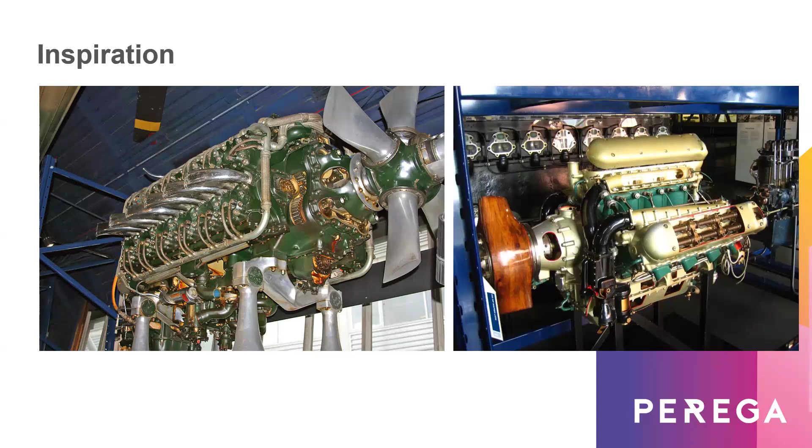So I started at school. I realised I needed A-levels, and then I realised I needed to go to university. Most of my school life was centred around sport. But before then, this is a picture of the front of one of the aircraft engines.

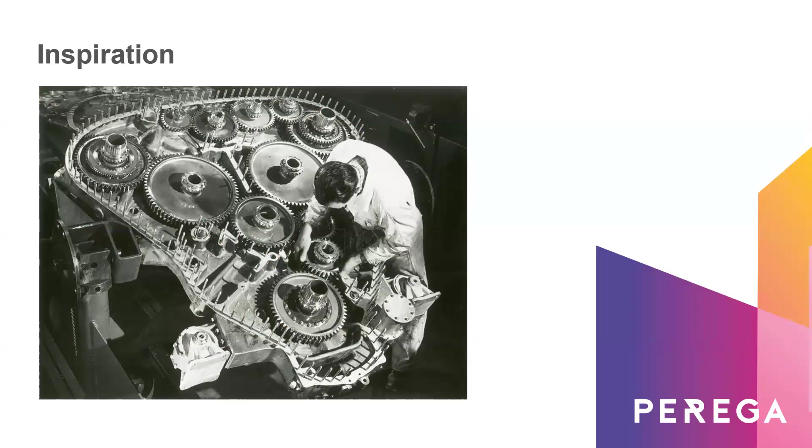1940, no notion of a digital age, no computers. Everything was done by hand and feeler gauges. And when you look at that and think about the engineering, this is mechanical or aeronautical engineering, we would find it quite hard to do that even now, so let alone then.

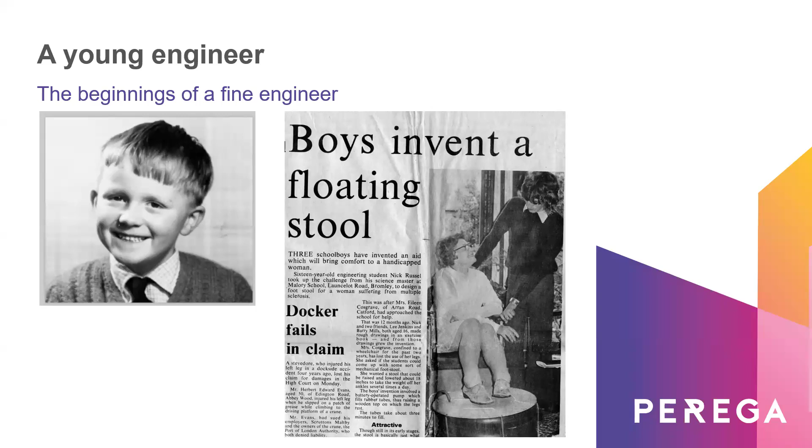The press came along, took the photographs, off they went, and she said, right, how do I deflate this thing? Press the button, and it didn't work. We did eventually get the stool to work, but one of the things about what civil and structural engineers do is that it really has to be right first time. There isn't any real room for failure.

And my parents were very supportive. They said, look, we'll support you through university, but you've got to stop doing all that sport. You need to knuckle down and learn. So day one of university, I joined the sailing club, which has been my passion ever since.

So very, very quickly about Perega. We were formed in 1947. 6 offices in the UK, 85 staff. The pandemic saw us dip a little bit, and in this financial year we've taken on 15 really good engineers. We're active in various sectors: health, education, retail, but the only thing we really don't do is heavy civil engineering work.

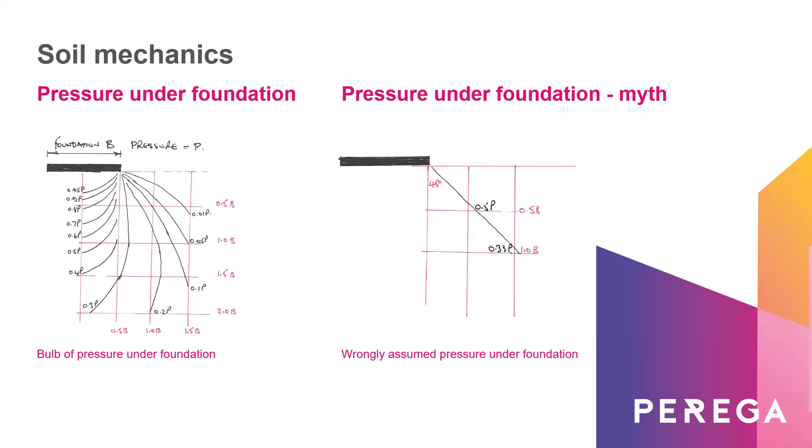And pressures on the foundations - one of my first cases is all about this, where a pressure bulb is very much like what you see on the left-hand side. The 45-degree slope where pressure is supposed to dissipate is really a bit of a myth. And this whole question of the bulb of foundation pressure has caught a lot of people out.

So, on to the first one. This is a basement in London, in Mayfair. Mayfair is one of the sort of posher parts of London, if I can put it like this. This building, about 200 years old, and the client wanted a basement constructed under the whole of the footprint. The building itself is a collection of load-bearing masonry and brickwork construction, pieced together over the years, but in relatively good condition.

Underneath the building is one of the old rivers of the River Thames. A lot of the rivers have been culverted, covered in. Some run in tunnels, some just run through gravel, some just run through the ground. One ran right underneath this building, called the River Tyburn.

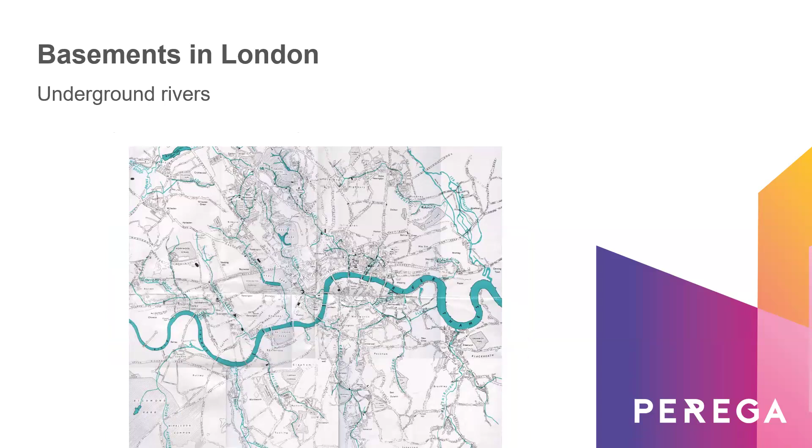And then the plan was to construct a piled raft underneath the building, between all of the steel columns, and construct a reinforced concrete wall incorporating the steel posts.

Now, unfortunately, very little site investigation was done. The client decided that would all be done once the contractor was appointed, because when contractors do site investigations, of course, they do them for free - but we all know that it's included in the cost.

So what happened was that the load of this building was transmitted down into some of the soft alluvial materials that were formed by the old River Tyburn. Not immediately, but gradually the building started to settle under its own weight.

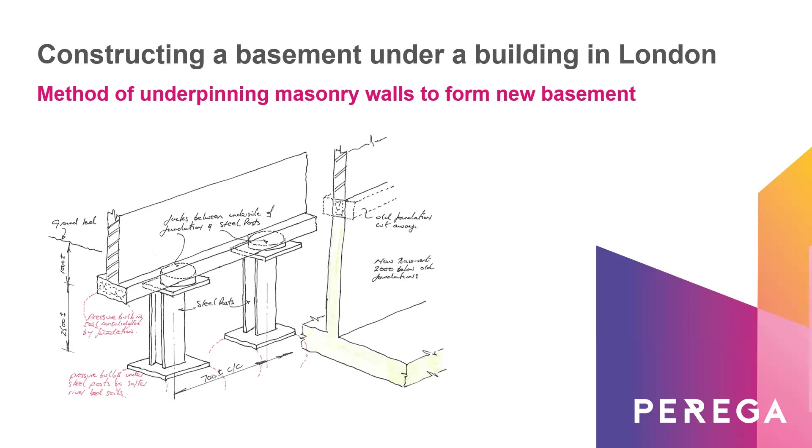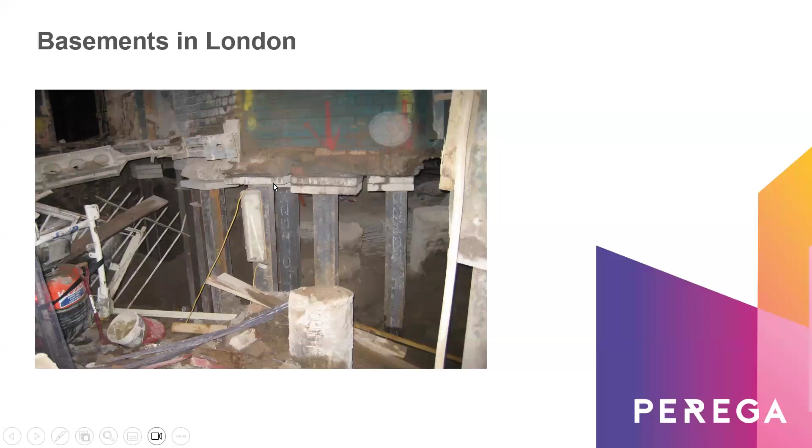Here you can see some of the very congested area where the construction took place. These are the steel columns that were being put in. Some were simply bricked up underneath the foundations, whereas others under the main wall were jacked into place. There again, we can see some of the work that took place.

One morning, at the start of the day, the contractor noticed cracks forming in the superstructure. They started to monitor it. By about 10, 11 o'clock, the cracks had got even bigger. They called out the engineer. They then had to evacuate the whole of the building because the cracks were getting wider.

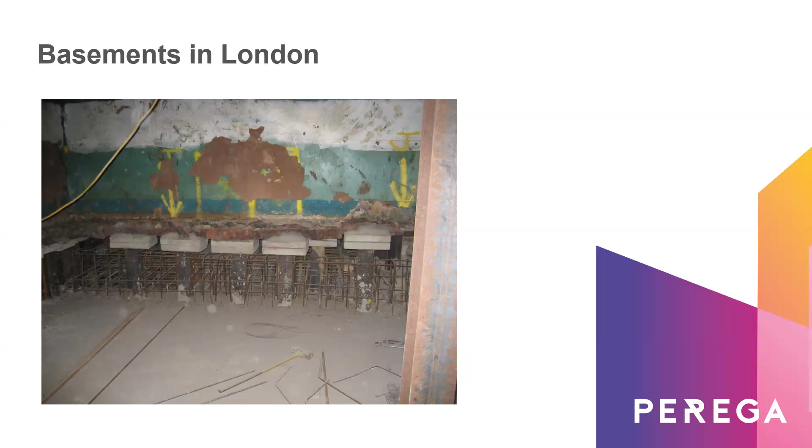Various types of profession in the building. And then by about 7 o'clock in the evening, part of the building had collapsed. You can see it's very, very dramatic. Fortunately, all the people occupying the building had managed to get out.

There again, you can see the nature of the construction of the building - a lot of it was timber, load-bearing construction. So an example of how not to do underpinning, a lack of appreciation of how you transmit loadings from the underside of a foundation down to a lower level.

The foundations, over 200 years, had compacted the soil beneath them, and the soil had become in equilibrium with the weight of the building. By transferring that load further down into much softer material, this caused the gradual settlement and the collapse of this part of the building.

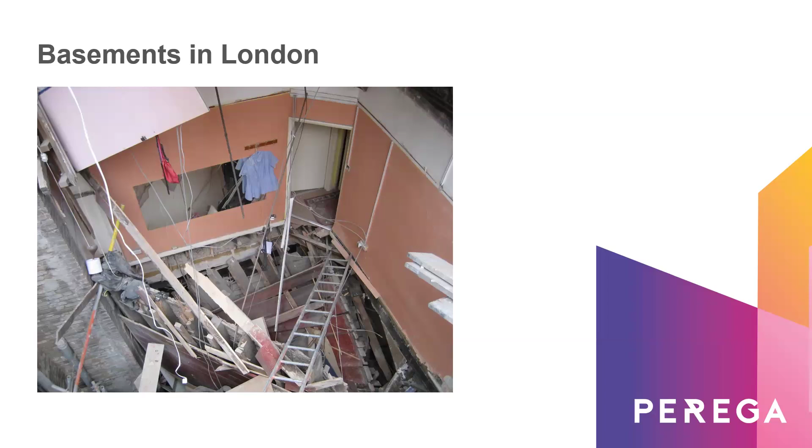So, the sort of things we take away from this: really do think about site investigations, and make sure your client understands the need for them at the beginning, not when the building's starting to be constructed. Think about investigating the building. Again, the client wouldn't pay for investigation until the contractor was on build.

One of the two partners of the consultant working on the project was the director of the piling company that was employed to construct the foundations, and that person checked the piling calculations, which were later found to be in error. So there was a clear conflict of interest there. The engineer did accept, in hindsight, that they should have been more thorough, and should have been far firmer with their client about investigating the building rather than letting matters progress as they did.

This one is a building in England, and I'll just mention that all of these cases have been settled. They are of some age, so there are no commercial issues in me telling you about these things. Naturally, I've left out some of the things which are confidential.

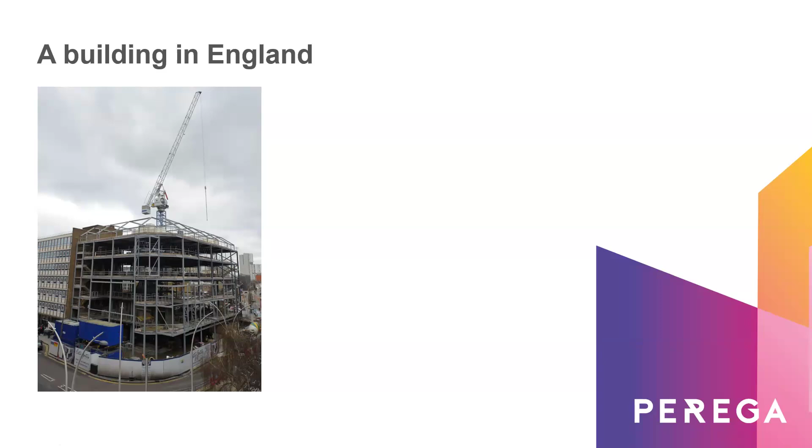So, steel frame building in England. The idea was that from first floor level to the underside of third floor level was going to be a clear opening with seating around the outside. Part of the building was a library, part was an exhibition centre. So you can see the cross-section this way.

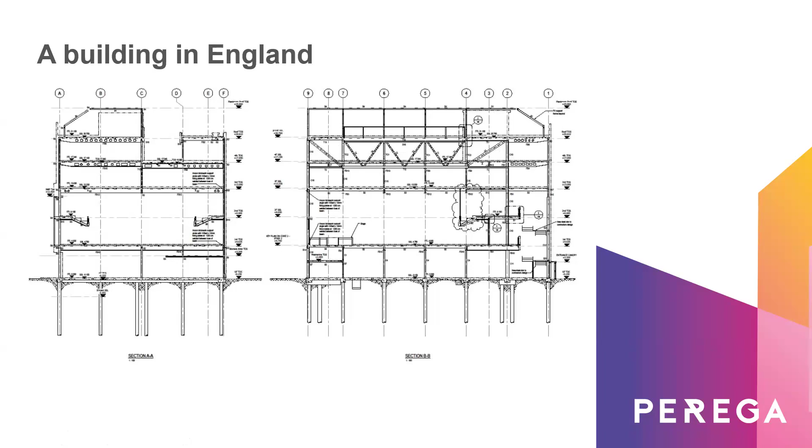The important thing to note is that at this level, fourth floor level, between fourth floor level and fifth floor level, is a truss. The truss is suspending with three hangers here, four hangers here, suspending this floor. This section applied as you go through the building, so a very large atrium area through the building. You can see that there.

So, as we would all analyse, you've got your truss, you've got the loadings from the hangers, and you can sketch fairly easily the direction of the forces. All fairly straightforward stuff.

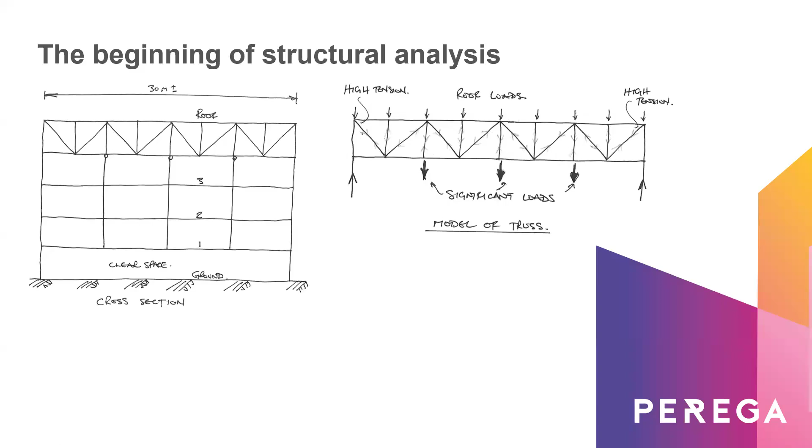This one was put into a computer model a few years back, an early version of a computer model, and it was modelled like this: all of the loads were applied to the top of the truss, no loadings on the bottom. So, as we all know how to design trusses, these loadings, according to the computer output, were zero.

The connections, as we'll see in a minute, the connections at the end of the truss here were not very well made. Fortunately, the fabricator put minimum connections into each of these hangers, something like four M20 bolts as a minimum. So although the force in theory was zero, there was a certain amount of capacity in the truss.

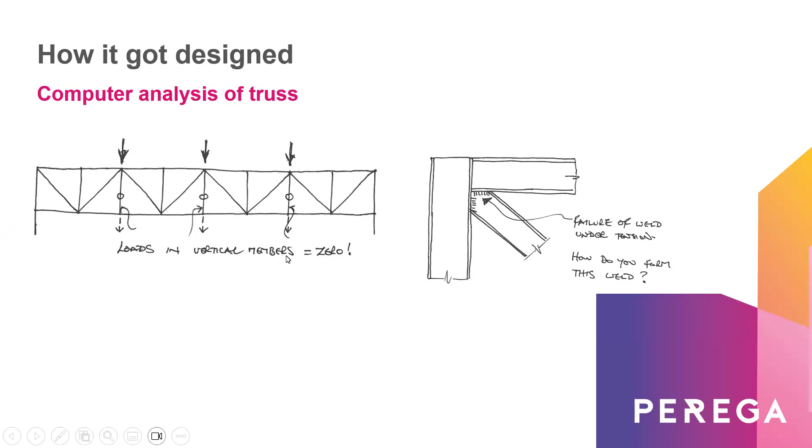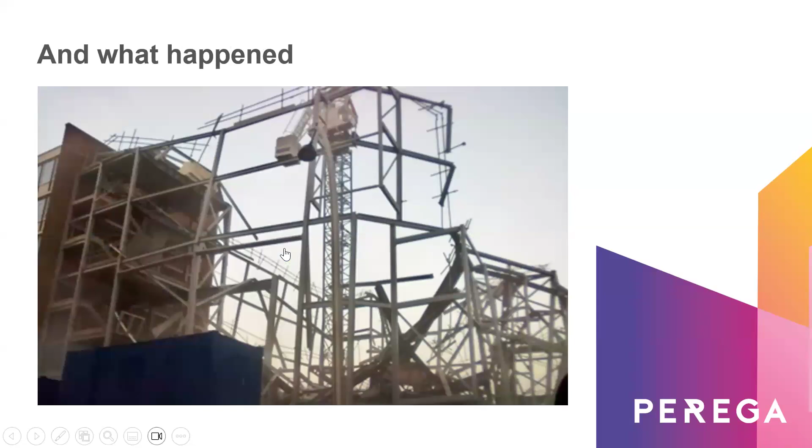Twenty minutes later, just after the building had been vacated, that's what happened. So one of the things you see from this is that it's not a particularly robust building. There's not many load paths, and here we can see one of the trusses lying across all the other stuff. You can just about see the connection there.

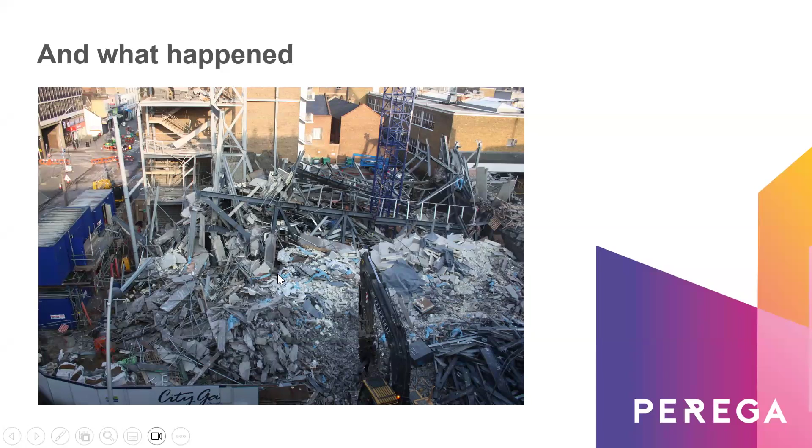The failure was partly the hangers, partly the building, the floors beneath failing, pulling the truss in, and some of the connections just failing. We can see it there, we can see it there. This was a sketch done at the time, showing broadly what the connection looked like and where the inception of the failure took place.

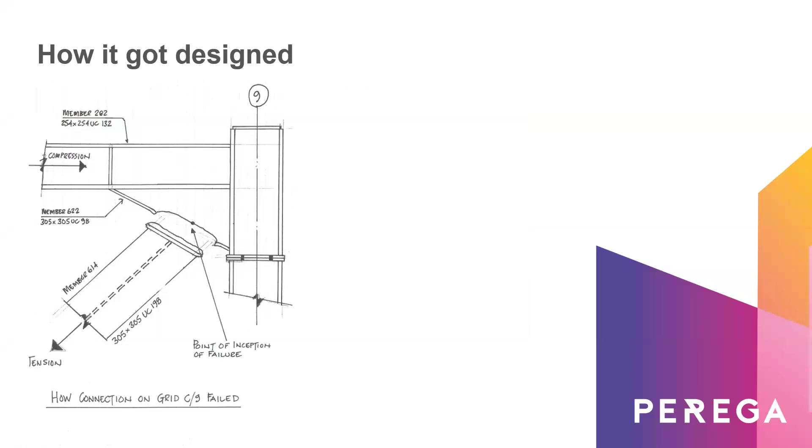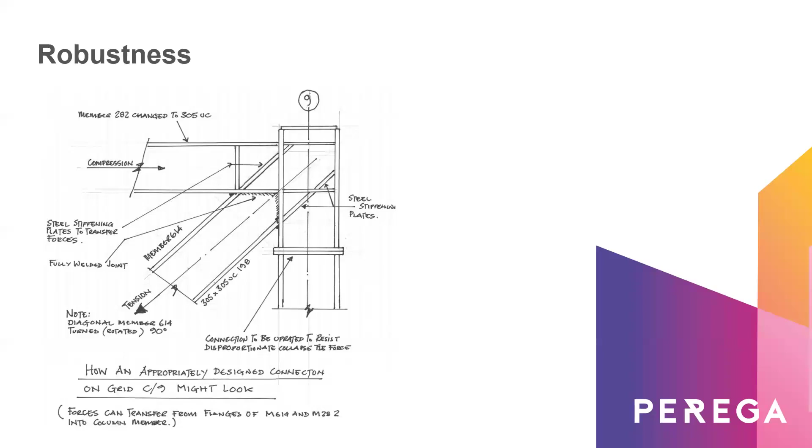That was a sketch we produced simply to show the difference between a robust connection and one that isn't robust, so that all the forces are going back into the body of the truss rather than relying on very, very simple web plates to transmit that force.

I suppose the thing you really learn from this one is that anybody can work out loadings. We can all do load takedowns, but you need a certain amount of experience, and I think, you know, an experienced engineer to know what to do with those loads. Had somebody really just taken a step back, not got carried away with the model, not simply tried to do all of the design within the model, I'm sure that would have been spotted and this wouldn't have happened.

So this one here is a gas pipeline.

Like South Africa, I think I showed this one to people when I came in 2014. But like South Africa, we used to manufacture a lot of our gas by burning coal and forming coal gas.

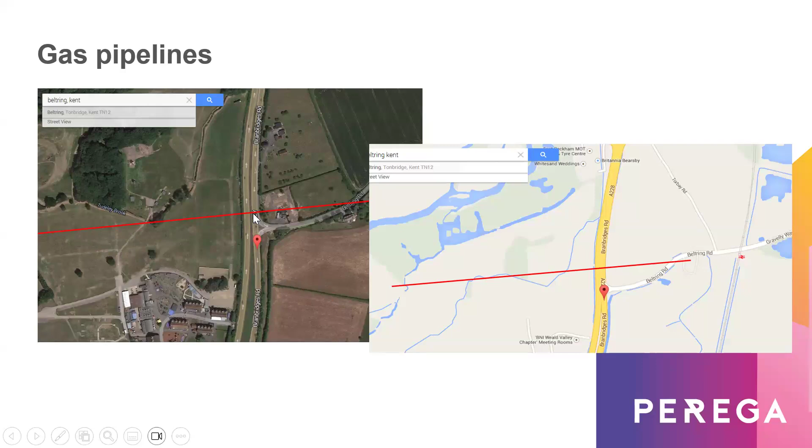As time went on, the roads developed. This is the line of the gas pipe, which goes underneath this busy dual carriageway. This is a map taken from some of the old Ordnance Survey maps. This is the old country lane that went through here, and this is the A road, which we'll talk about a little bit more in a minute. This is where the gas pipe went under, and then this road later became a dual carriageway - a very busy, very important road running north to south in Kent.

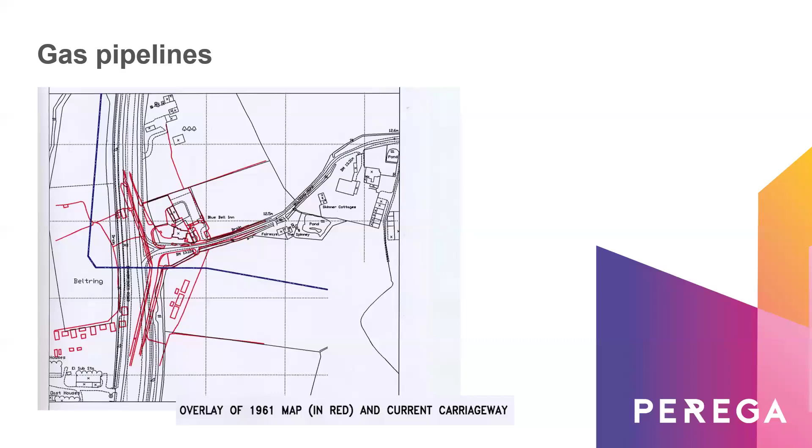This is a picture of the way the gas pipes are put together. A number of gas pipes are all welded together, ultrasonically tested, and then lowered into the ground. As you'd imagine, relatively little site investigation needs to be done - we're simply digging the trench, putting the pipes in, and covering them up.

Just another picture here - this is what happens at changes in level, and this is an enclosure here where they're doing some welding.

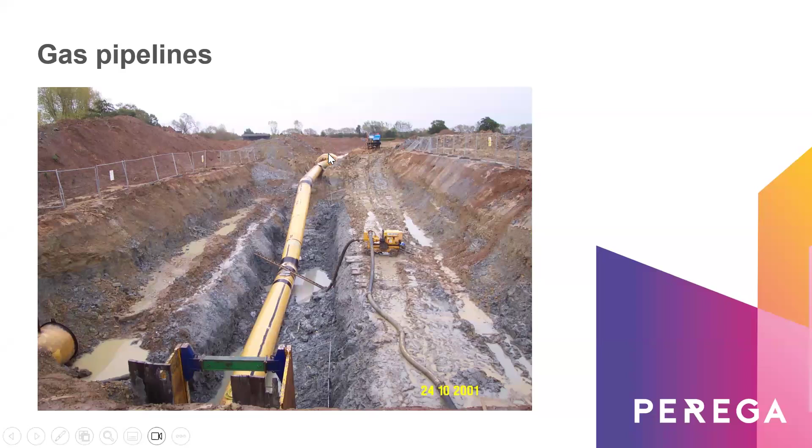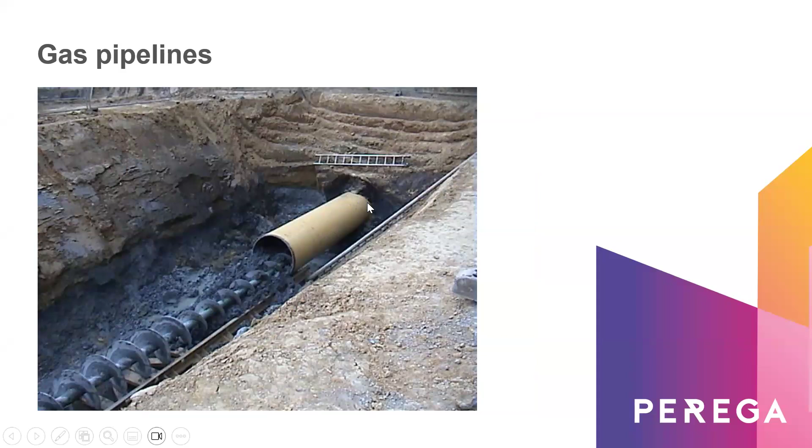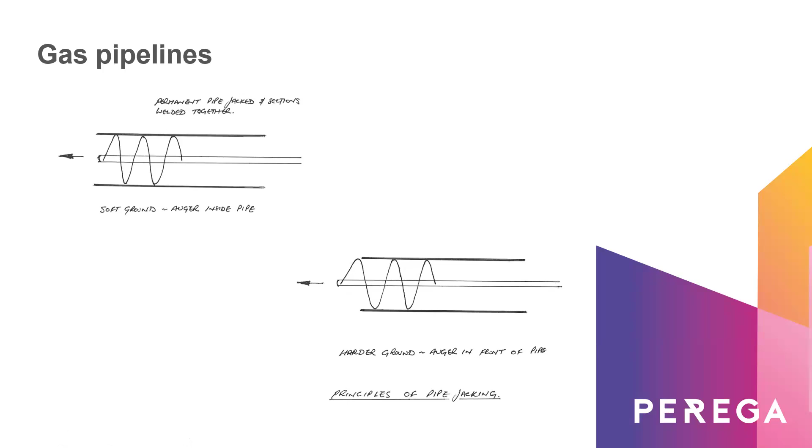When we get to a road or a canal - because this pipe's gone under a couple of canals already - you have an auger, and the auger takes the material out of the front of the pipe that's being put into the ground. In soft ground, the pipe is jacked in, and the auger, which is inside the pipe, augers away the material. In harder ground, the auger is advanced slightly in front of the pipe and augers away the material, and then the pipe is jacked along its route.

And you can just see it here - this is a pipe being jacked in underneath the road, and this is the motor and the jacking point.

Now just look at this. This here is a previous attempt to go underneath the busy road at a higher level, and you can also see it here - it's been blanked off.

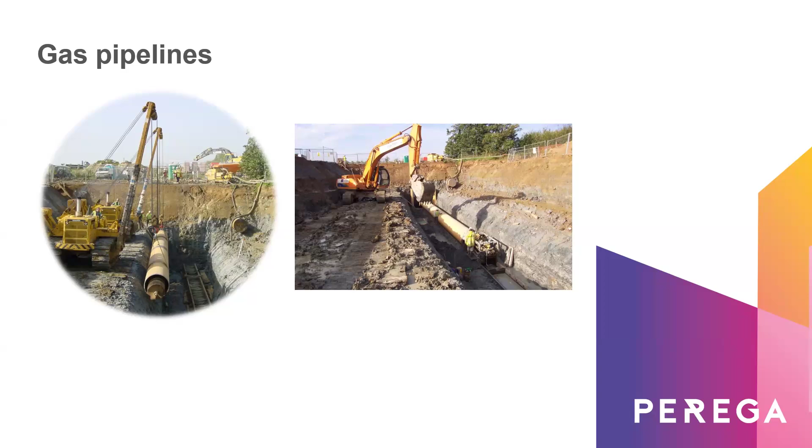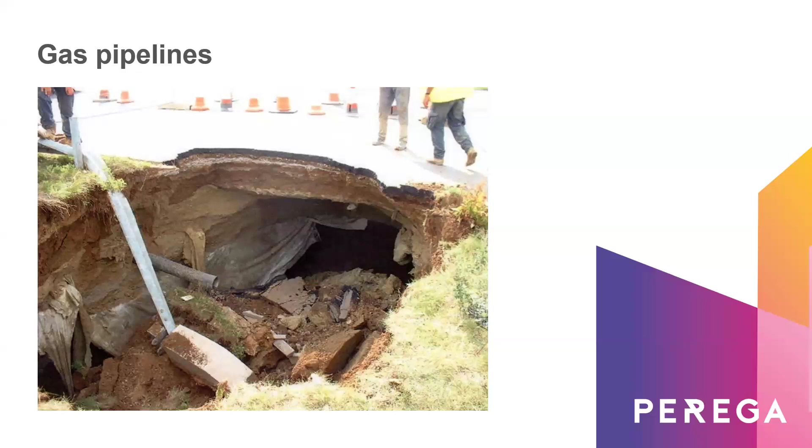And there again, we can see another picture of the damage - this is what happened. The county council became very concerned about the stability of the road. I think unnecessarily, in my view, but we ended up having to dig an extremely large hole to take out the remains of the bridge and the remains of the old river. It wasn't really the fault of the client that was there.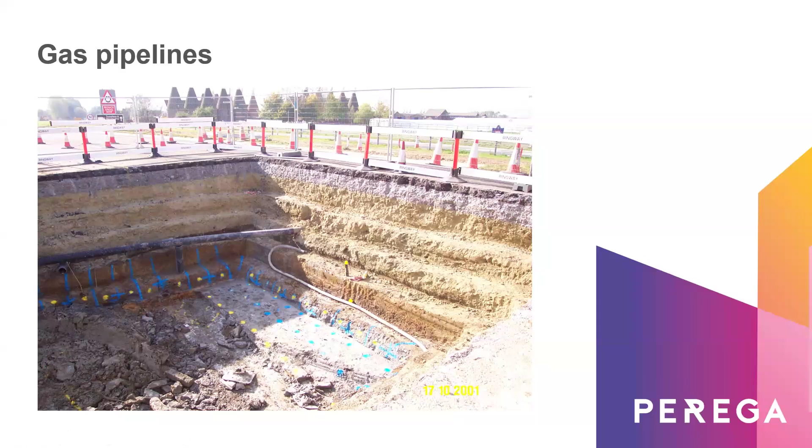Here you can see positions of pressure grouting going into the ground, and all of this took about 6 months. This building you can see in the back here - its trade relied on this road being open all the time, and over a period of 6 months, this business was nearly put into receivership.

So, the lessons from this one: there were no site investigations at critical points. You would think that each side of a crossing - a road crossing, a canal crossing - there would be some site investigation. There was no site research either; nobody looked at the historical maps, nobody looked at the types of things that might cause problems along the route of this pipe - a mistake that could quite easily have been avoided. The issue seemed to be that the pipeline was so long, and the budget was the budget, so they just carried on and didn't investigate too much.

So, sources of information: local records, place names - sites will often reveal their past. Things like Foundry Road, Marsh Road, Cemetery Lane, and even asking the lady at the bus stop, which I've done on more than one occasion. If you're investigating a site, you can strike up a conversation with somebody, and it's surprising what they might tell you about the history of the site.

This one is in eastern England, and this is another old gasworks. All of the coal being burnt here, and the coal gas being put into these gas containers here.

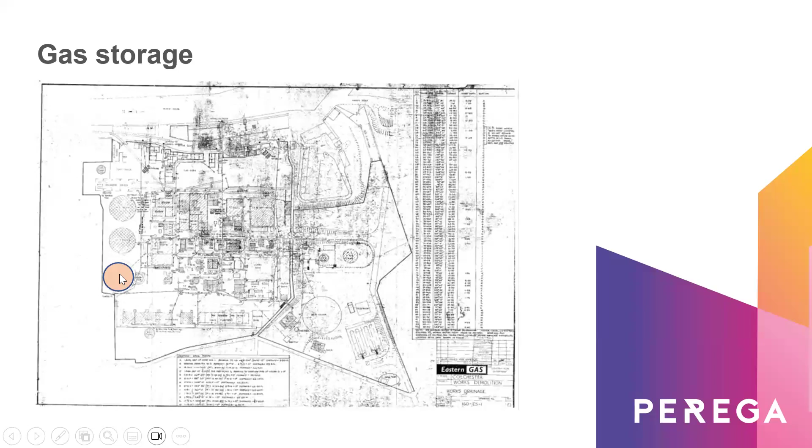As time went on, the gasworks became redundant. These are the 3 gas holders again. By this time, there's a spoil heap that's been constructed here by some works that are being carried out here. This is completely separate from the gasworks site.

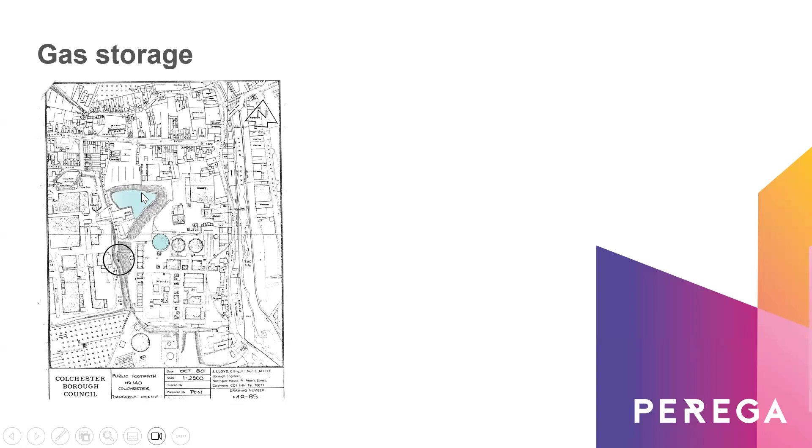It's not water; it's just coloured blue for recognition. So this is an embankment, and this is a sort of plateau level. There it is in a bit more detail, so there's the circular gas holder. This is the plateau here, which has been built up over time.

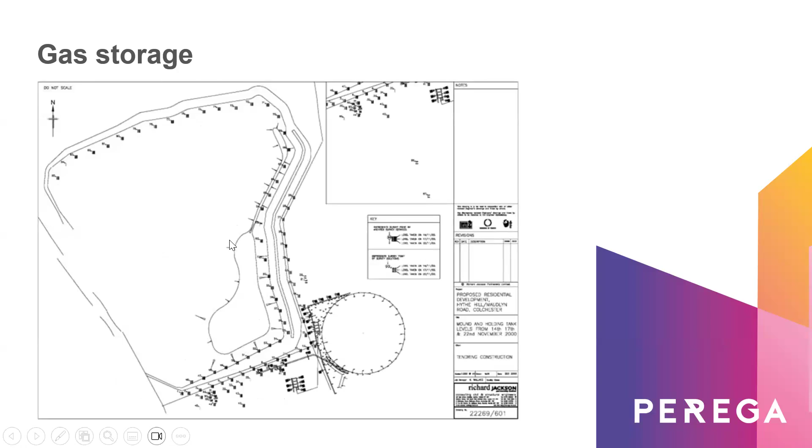Don't ask me why, but the local housing developer got permission to build a housing estate on top of it. Perhaps they thought the views might be quite nice from the top of this mound.

And there we can see it there. So this is the gas holder, and this is the mound here. This is about 80 degrees. I'll show you some plans in a minute. They're not very good quality, unfortunately, but this mound was increased in height.

The face of the mound was stabilised using tensile reinforcement, so geotextile material. Before that was done, the ground beneath this mound was improved by vibro stone columns. Again, not the best of site investigations, but the vibro stone columns were augured down, filled up with stone, and that was intended to support the additional weight of this embankment.

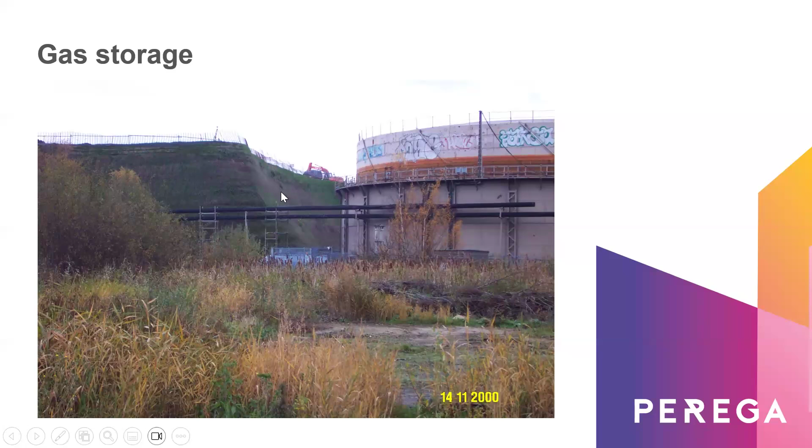So there again, we can see another picture of it, so you can appreciate the steepness of the embankment that's been formed here. Again, building works in progress.

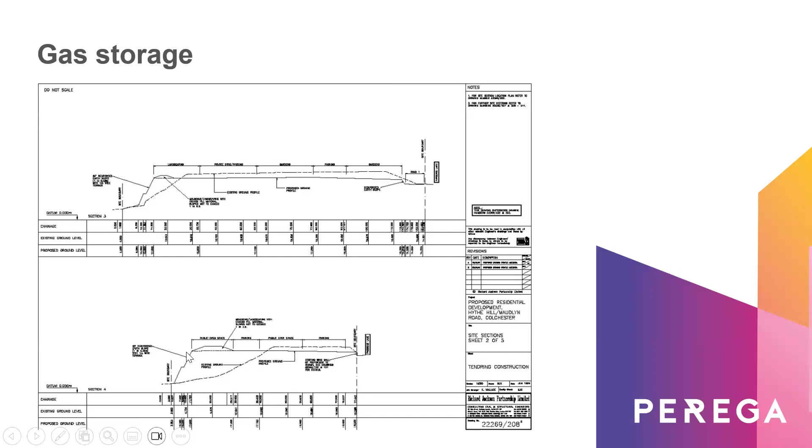This is a cross section through the mound. If you can imagine, the gas holder is somewhere here. This is the original profile. It was vibro compacted. This is the line of the additional material, and this is the side of the embankment.

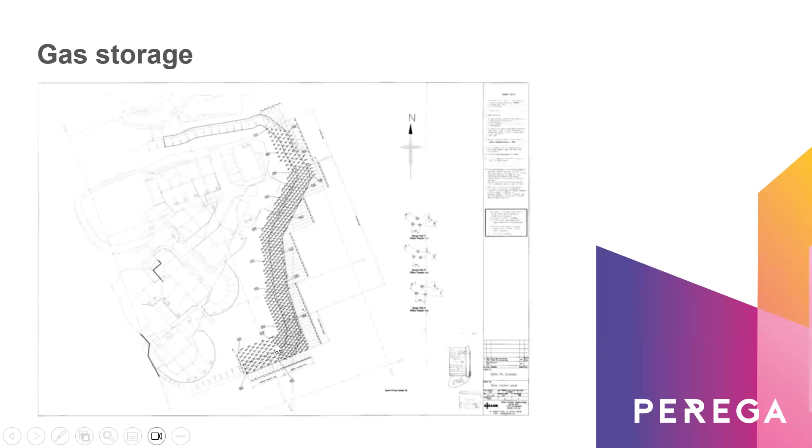This is not a very good drawing, I'm afraid. This is really just showing the positions of some of the vibro compaction that was put in on the toe of the wall, where the bund was increased in height. There we can just see some cross sections here showing some of the tensile reinforcement that was put in.

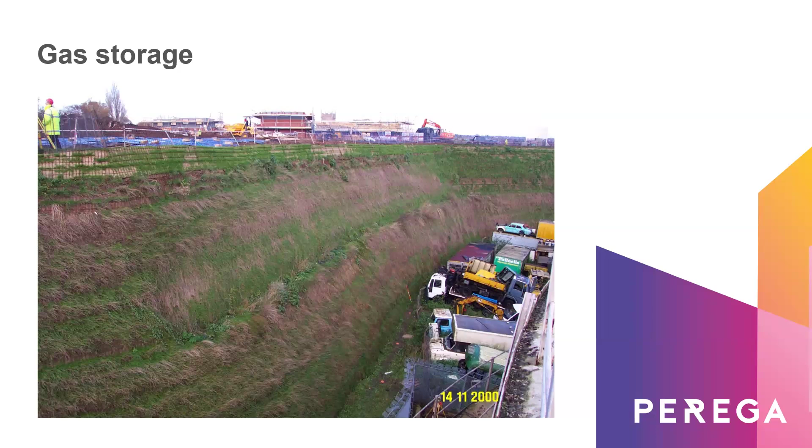This photograph here is after the embankment had failed. The loading that had been applied had caused a deep slip of the ground. These lorries here were all parked normally, side by side, on a hard standing. What we can see here, and the sheer scale of it makes it difficult to appreciate, but all of this has mounded up. All of the lorries have been pushed upwards and sideways. This has moved downwards and caused a very, very large shear failure across a wide area of the ground.

This is the gas holder. It was piled and held 250,000 cubic feet of gas, which is 7,000 cubic metres. After this happened, there was emergency works to get the gas out as soon as possible.

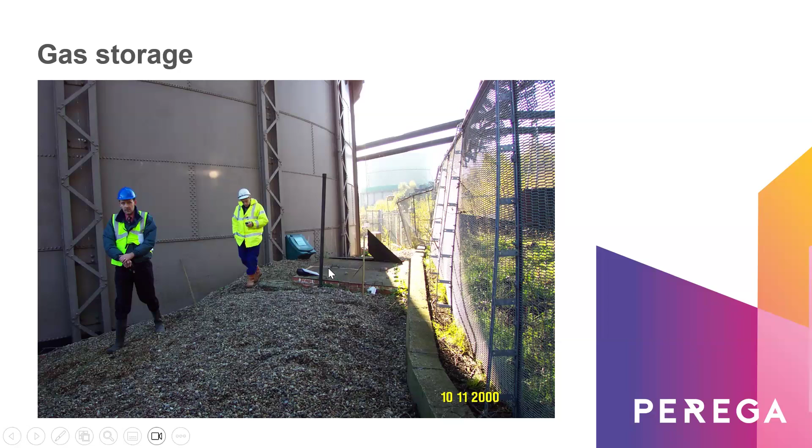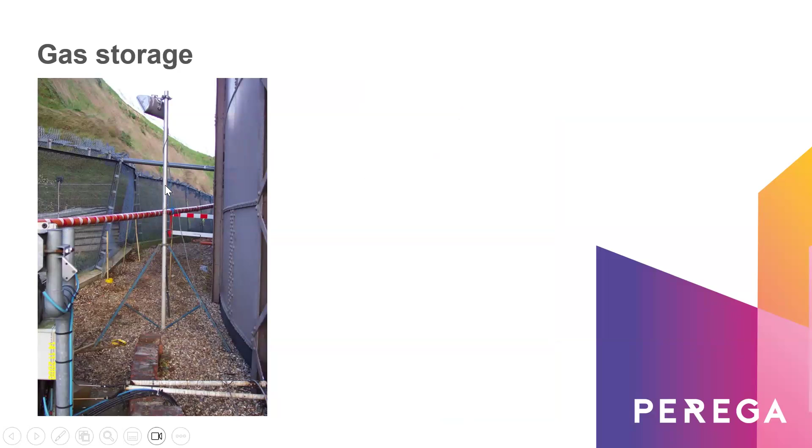Again, difficult to appreciate the amount that the ground has risen, but you can see here, this is the gravel around the side of the gas holder. This has been moved up by about 2.5 metres. This pipe here is level, and this fence line used to be level with the pipe. You can see how that fence line has been pushed up as a result of the failure of the ground.

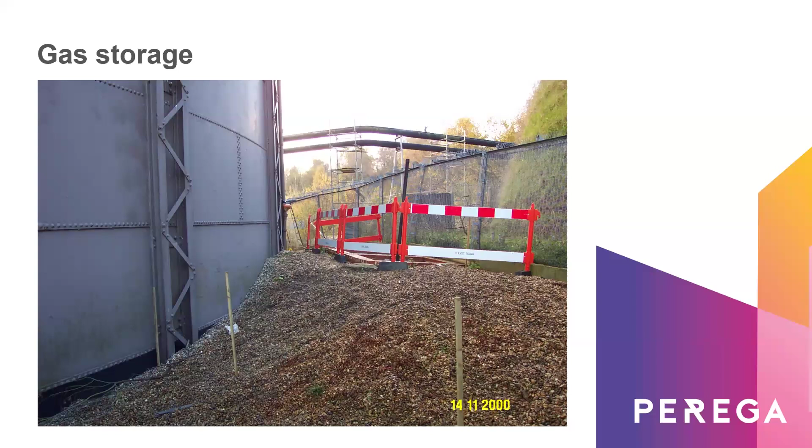There again, we can see the effect of it, this is just a small part of it. These are the gas pipes that go into the gas holder. The gas holder was simply being used to store excess gas from the gas grid. That's just a shot at the side showing the failure of the A-frame supporting the gas pipes going into the gas holder.

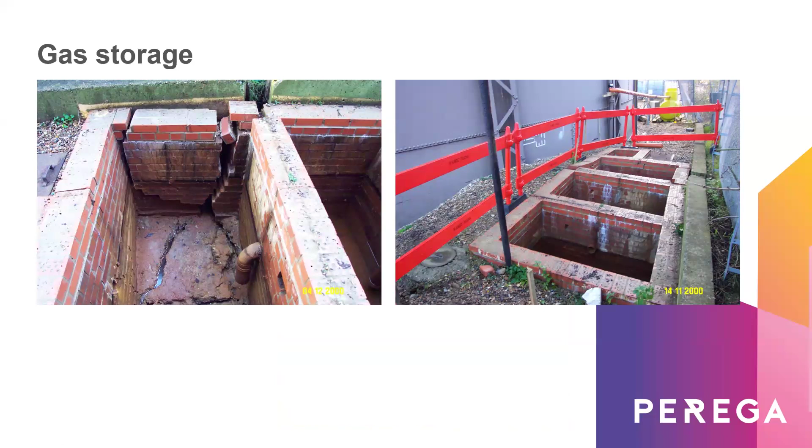These chambers are about 2 metres deep. Again, you can see the amount of heave by the smaller crack at the bottom, the larger crack at the top. As I say, it's very, very difficult to appreciate the extent of the failure of the ground, because it's very, very difficult to photograph large areas of it.

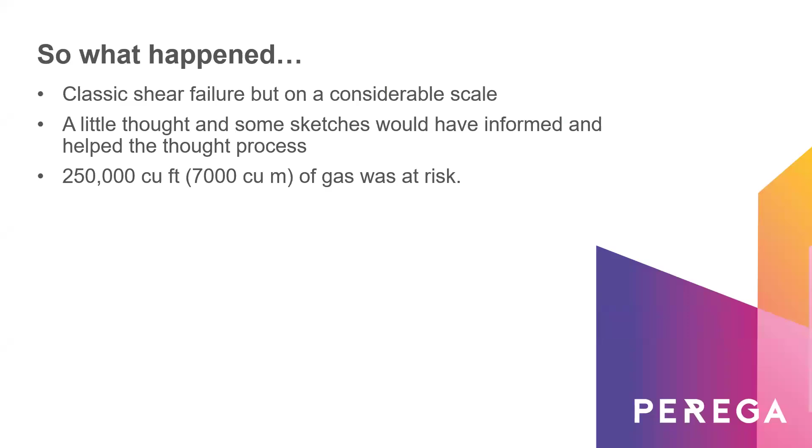So, a classic shear failure, but on a very, very considerable scale. Very little thought had gone into the strength of the materials below the bund, and I just think some sketches and a bit of thought would have informed the process. And what happened? This is the gas holder.

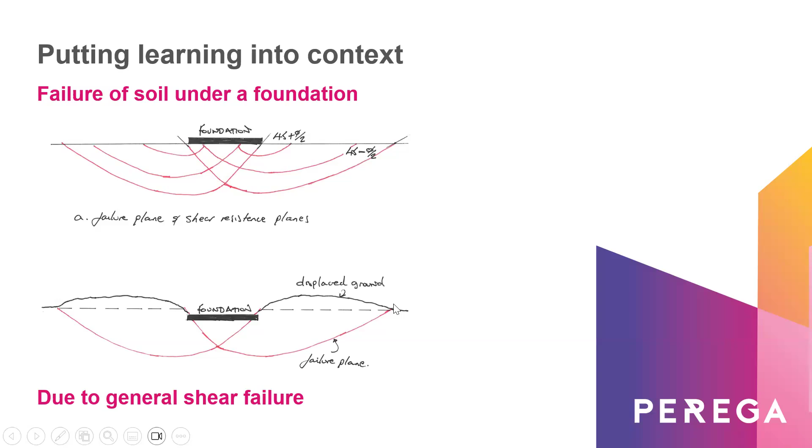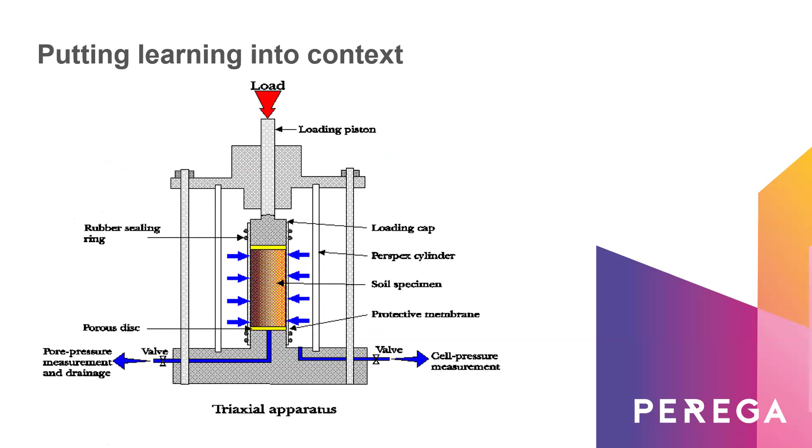This is effectively the bund, which had dropped downwards, with a very large shear failure that had occurred. When I talk to students about this, the analogy is very much like a triaxial test. You're putting load on the top, which is the additional weight of the bund, and applying different levels of lateral pressure. There'll come a time where your clay specimen will fail under shear. What happened here is that the ground on both sides of the stone column wasn't strong enough to support the lateral forces, and that's what caused the settlement.

Very little could be done to remediate the situation. The side of the toe of the embankment, which was about 80 degrees, was raked backwards. The housing plan was modified. Further back here was okay, but this whole area was repiled, restabilised, and a lot of the weight associated with the front of that embankment was just taken away.

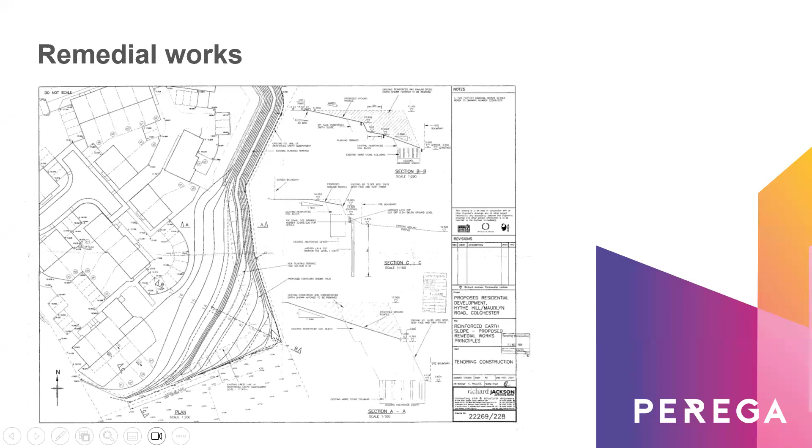So the lesson to take away was think about the additional loadings and think about risk.

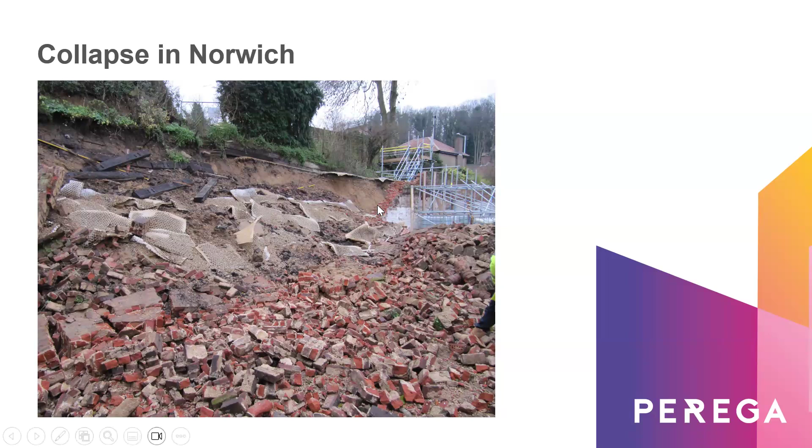They demolished the lightweight buildings, took up the slab, and unsurprisingly the toe of the wall simply went forward and collapsed. With it, the whole access road that runs along the back of the wall here went too. You can see the wall there, the road ran along the top, and you can see the end of the road.

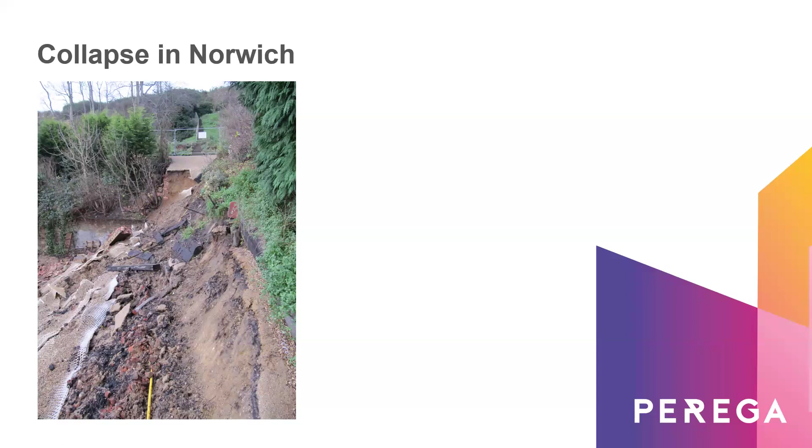As well as having to reconstruct that wall, the owners of the site had to compensate the owners of the house. Both of their cars were parked outside the house at the time, so the cars were stranded there for about 6 months. So there was the cost of this, plus the cost of providing the homeowners with a walkway just behind the trees and two cars to use whilst the whole thing was being repaired. The amount of damages to the wall and the homeowners was almost the same as the cost of building the houses.

Lessons to take away: does the structure look proportionate, and what holds the wall up? I'm sure a lot of you are scratching your head saying, well, quite obvious, isn't it? You would dig some trial pits, you would have a look at that wall. These large masonry walls are there with a very low factor of safety, but there's lots of people who wouldn't do that.

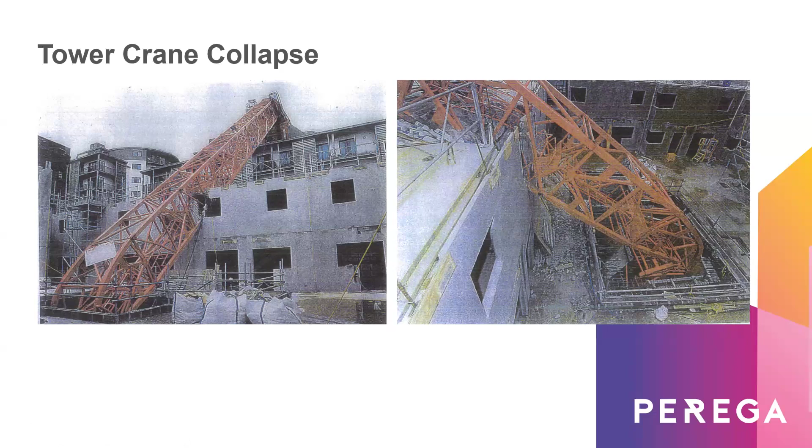This one is very serious. Somebody driving this crane survived, but suffered life-changing injuries. Up in the north of England, this is the failure of the base of a tower crane. As the crane came down, it wrapped itself around an adjoining building. These pictures come from one of the newspapers. So again, you can see what happened here.

It's a luffing jib crane. Just for context, that's the tower, and this is the jib. The jib can go anywhere from there around to the horizontal, and it's balanced by a counterweight at the back, which is quite clearly counterbalancing the load there. When the jib is right up here, the overturning moment on the base of that crane is almost as high as the overturning moment there. In fact, this is the design condition with the jib right up.

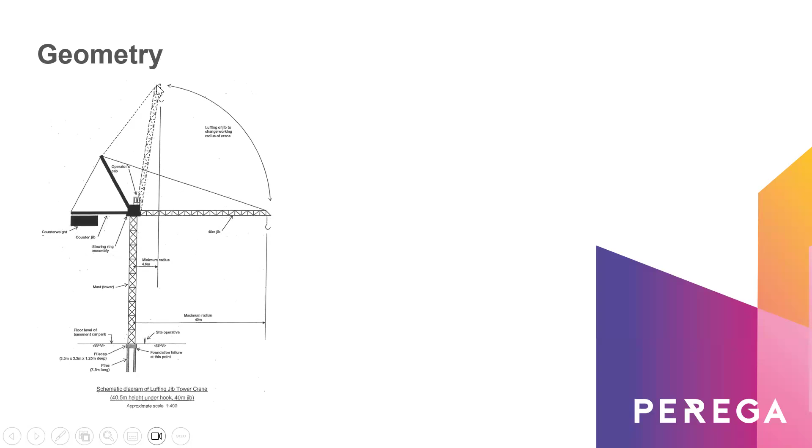The first thing that went wrong was the analysis of the four pile cap. The people that designed it worked out the moments about this axis, but didn't work out the moment about that axis, because if you work out the moment about that axis, you've got one pile in tension, one pile in compression. If you do it about the other axis, you've got two piles in compression, two in tension. So that was the first mistake that led to the under-design of the piles.

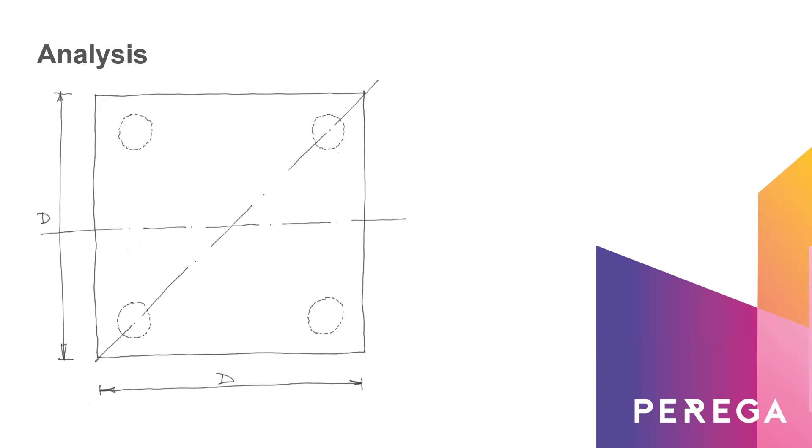To compound that, they also misread the crane loadings from the manufacturer. The third thing that happened was with the base of the crane. You get these four lugs that are concreted into the top of the pile cap, and it's all part of a framework. But unfortunately, the positions of the 4 feet of the crane coincided with the positions of the piles.

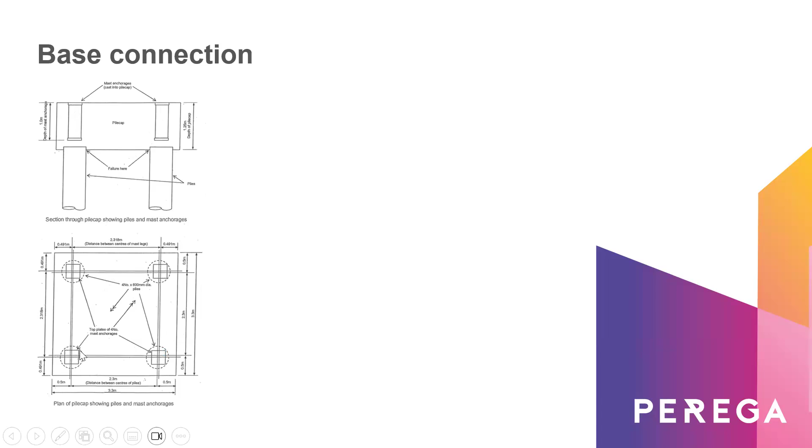So what did they do? The pile reinforcement was 20mm diameter bars, 6 of them arranged in a circle, and a 32mm high tensile Dywidag bar, which is really just a very high tensile bar, that was supposed to be cast into the top of the pile, into the pile cap, bent over. It was that bar alone that was designed to provide the tensile connection between the piles in the crane base and the crane base itself.

So they cut that off. They drilled 6 20mm bars into the circumference of the pile. The bars should have been grouted in by 450mm, and they were not - the average depth of grout was about 150mm. Worse than that, a 20mm diameter deformed bar has an outside diameter of 22.5mm, so they drilled a 20mm hole and somehow hammered the thing in. It didn't leave any room for the grout that should have gone in there. So not only were the bars too short, they were also very poorly grouted in - an extremely poor connection.

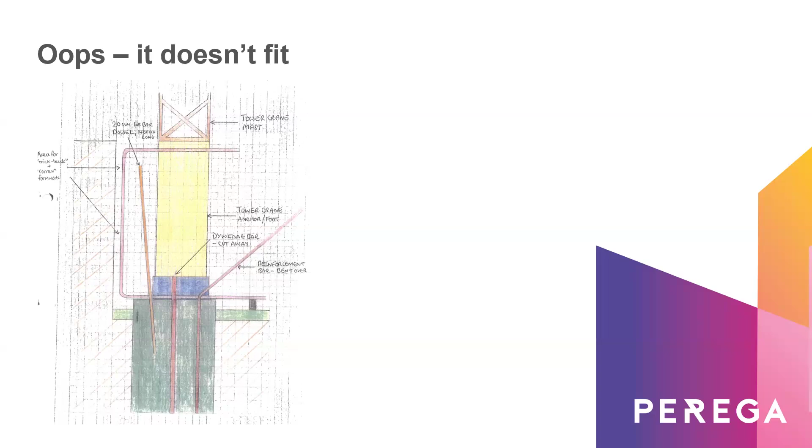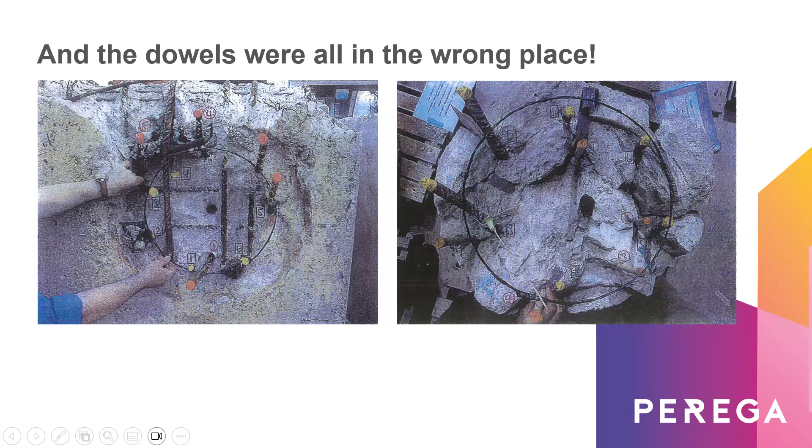When it was investigated, it was found that some of the bars - these are the bars here with the red hats on them - were outside the circumference of the helical reinforcement, some of them considerably so. So all sorts of things here just didn't go right, and it was poorly supervised, poorly constructed, and poorly designed.

Really, basic statics would have told somebody that they had got the pile design wrong, the design for the pile, the crane pile cap - how things fit together. They really should have looked at the crane base and had a look at where the piles were going, and thought about the critical things to inspect when doing this type of remedial work. Nobody was suggesting the remedial work was easy, but it was so important to get right that it really needed to be inspected.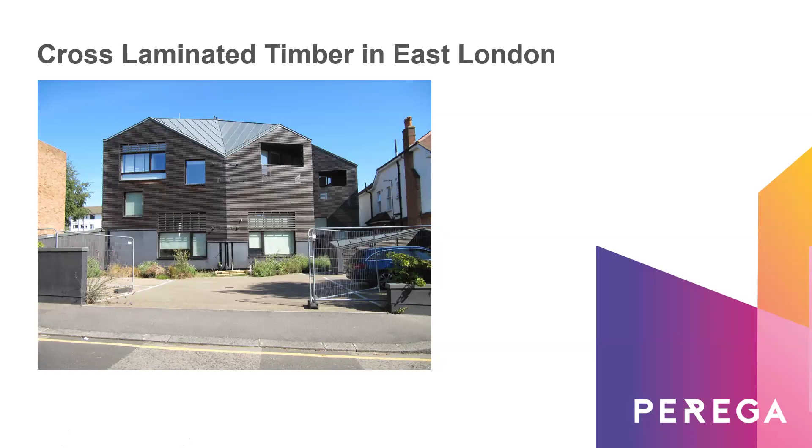On this side here is a retaining wall up to this level, just normal strip foundations, and then you construct the building with cross-laminated timber panels. The rules are that you have to construct them on a plinth, which is 250 millimetres tall, really to keep the base of the panels out of any damp and any water that might escape from taps and things like that.

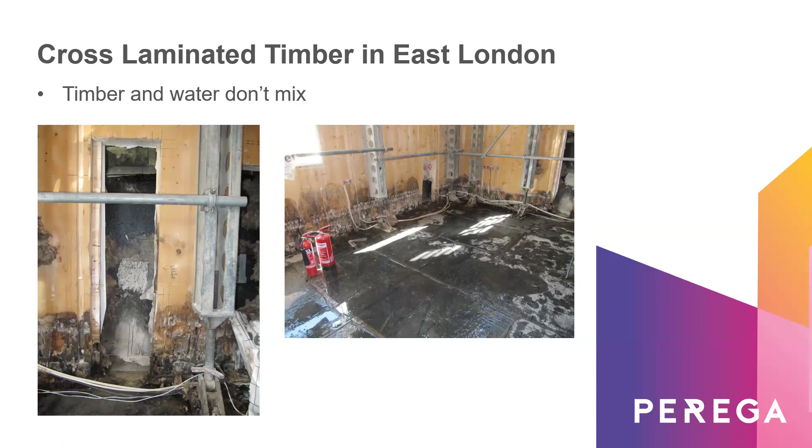What happened again - there were a number of water leaks in the flats. This here is the retaining wall that we saw on the left-hand side of the building. The retaining wall leaked, started to affect the cross-laminated timber, and over a period of a couple of years the bottom of the laminated timber started to rot away to the extent that it became structurally unstable, and the whole of it had to be supported by an internal system of shores and struts. You can see them all there.

The lesson to take away here is who is responsible for what. The cross-laminated timber supplier was responsible for the design. The consulting engineer was responsible for the ancillary design and the design of the foundations. It wasn't clear who was responsible for the waterproofing, because it wasn't in the architect's or the structural engineer's appointment. So that was really what caused one of the problems.

The consulting engineer also overstepped the mark and started to get involved in some of the design of the cross-laminated timber. So when it came to unpick all of this, nobody really knew what was happening. The thing to remember is make sure that everything is covered in your brief, and make sure that things that are important but not in your brief are put elsewhere.

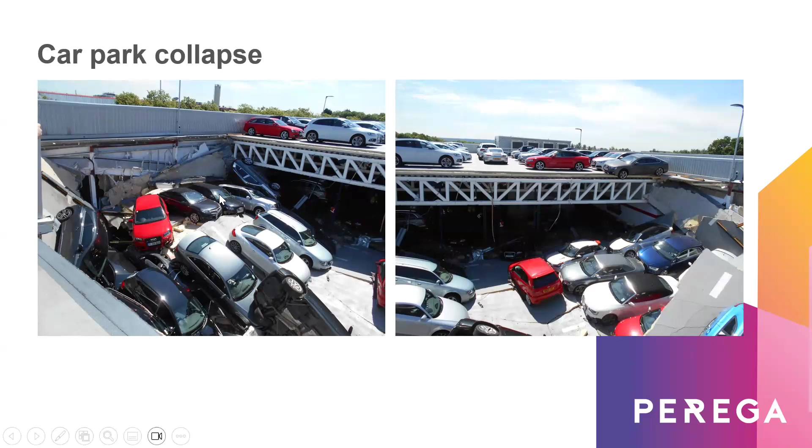Just looking at this one very quickly - this is a system-built car park, and there were a number of these built around the UK about 10 years ago. Problems with the connections at the sides here caused the truss failure. Somebody did say to me, well, they're only Audi cars, it doesn't matter. But I put this one in because if there are many of them, you just need to make sure that you have the right controls in place to make sure that there isn't a systemic design error that's going to replicate itself.

And the last one is an oil terminal, in Buncefield, just to the north of London. In 2005, there was a huge bang in the early hours of the morning. The terminal was being filled with oil, there was a leak, and over 250 square metres of the site was covered in fuel oil, which then ignited and caused a huge explosion. We live about 25 miles away on the opposite side of London, and we even felt the blast.

Our client had a building which was a portal frame unit with a curved roof. There was a suspended grid ceiling underneath, and a number of air-conditioned units built into the suspended ceiling. So what happened to our client's building was that the blast came across the top of the roof.

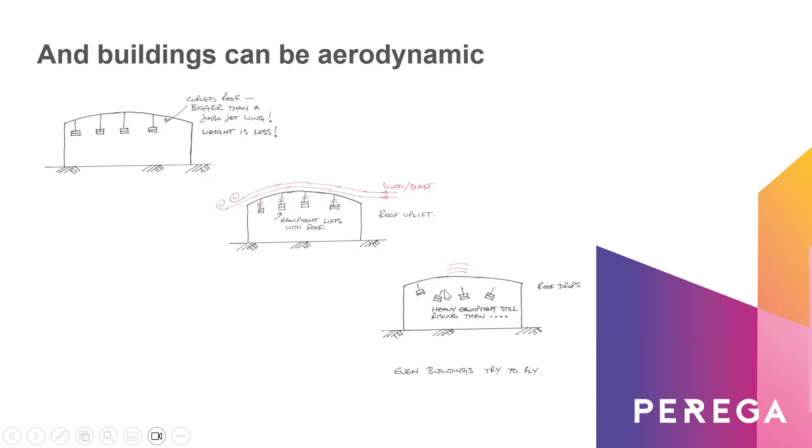So sometimes things are unforeseeable, just to bear that in mind.

So in the time that remains, I just want to talk very quickly about the rules about being an expert. They apply to the UK, so please do check that they apply in South Africa as well. I think certainly the basics do.

So, do you have a conflict of interest? That could be quite wide-ranging - personal contacts, company contacts, client contacts. It might be that your opposite number is a very good friend, so you need to think about that. It might be you have a very good professional relationship with somebody who's on the other side. So all of those things you need to think about so that you can not only take a balanced view, but be seen to take a balanced view.

So will other people see your views as balanced? Are they your clients? Are they your contractor clients? I've had a number of occasions where I've had to turn down expert appointments because of the issue of conflict, and you just have to make sure that you get that absolutely right at the beginning.

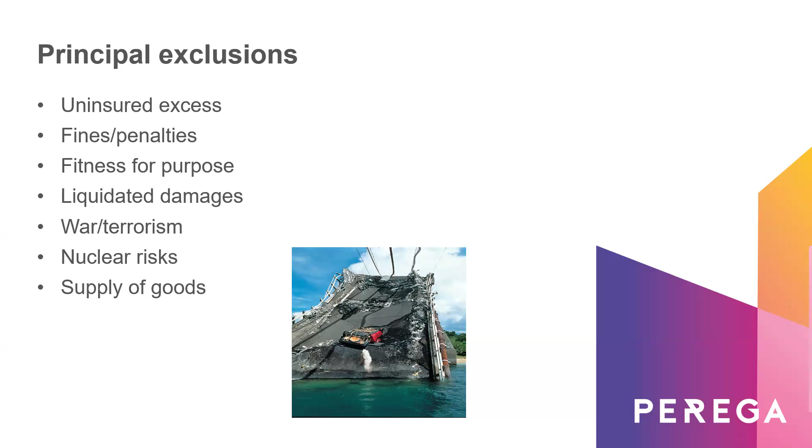Do check it's worldwide, or everywhere that you want to work, and make sure it's on a claims made cover, so each and every claim. There'll be an uninsured excess. It won't cover you for fines and penalties. It won't cover you for that wonderful phrase, fitness for purpose, because fitness for purpose implies a guarantee. If you're working for a contractor that's liable for liquidated damages, it won't cover you for that if they try to pass it on. And things like war, terrorism, nuclear risks, and supply of goods.

So, things that we do here. We make sure we have a design brief. We make sure that we can validate the scheme, that it works. We get our staff and the different people working on it, if it's civils and structures, we get everyone to buy in on the fee so that they know how much they've got to spend.

We check everything, or at the very least, we check the important bits. We validate our computer models by approximate hand calculations. And when things change, we have another look to make sure that we're not somehow invalidating the model that we have. And if it does change, I always say the stroke of an architect's pen can take a week of a structural engineer's time. If it does change, then we must tell our client.

And managing the risks. If we do find ourselves at the end of a claim, prompt notification to our brokers. Don't try and hide it. Don't try and work your way out of it. And really stay involved with the strategy.

Make sure that you know what it is that your insurance company are doing to resolve it, in terms of agreeing liability, the amount of the quantum, the amount that's being paid, and how it's being resolved. Although it's your insurance broker, it's your policy, and you just need to make sure that you know what's going on if the worst comes to the worst.

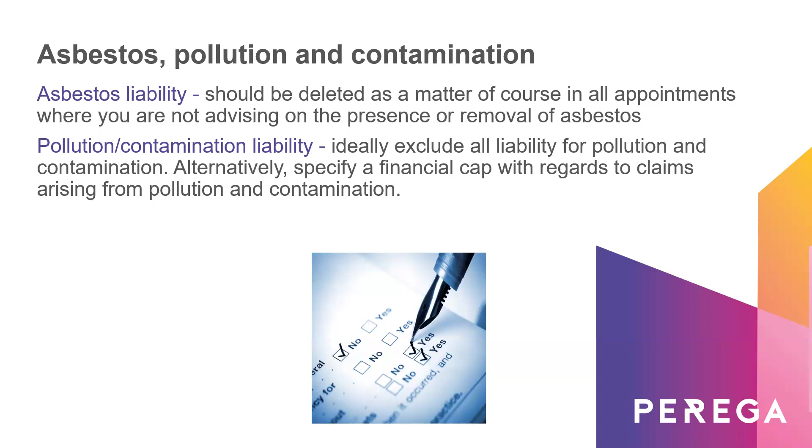Asbestos, pollution and contamination — make sure you know what you're covered for. And can you get a financial cap? Can you somehow agree with your client the maximum amount you will be liable for? Clients don't particularly like it for obvious reasons, but it's worth having a go.

And in the UK, we now have new forms of contract that require early warnings to clients and contractors. And of course, we're all nice consulting engineers — we all like to help out. But we're in a world now where, in the same way contractors have to give early warnings, we have to give early warnings under certain contract conditions. No bad thing, really.

So finally, just make sure when you read your agreement, you read the words and place a literal interpretation on them. If the clause doesn't make sense, it's probably wrong. I've often gone back to the drafters of these things asking what it means, and it often gets changed. What is it the client or the beneficiary is really trying to achieve?

Try and use standard forms of contract — the ACE or the Construction Industry Council, or you might have standard forms in the Republic. It's worth trying to get those. Every word and every clause will be there for a purpose, so make sure you understand what it is.